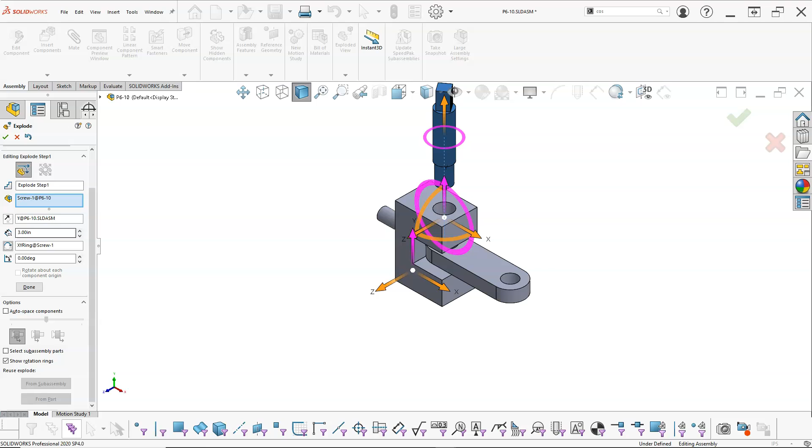Apparently my auto spacing is on. Since I'm only doing one, I'm going to turn the auto space off. And we should still be in that chain or that step, since I haven't accepted it or done it yet. So if I put in 2 inches, it's a little bit more, maybe 3 inches. Okay, that's visible. Then I can mark it as done.

And then I'm going to bring this one out in X, and auto spacing was still on. So we'll go done. And then I can bring this one out. Maybe I'll turn auto spacing off first this time. And we'll bring it out. It goes a little bit quicker.

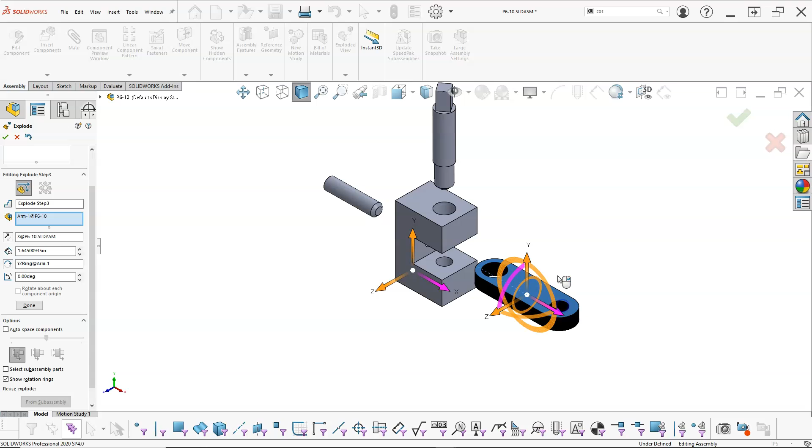Once we have the exploded view, that's going to live under the configuration tab, under its configuration, even if the only one's the default. If I double click on the explode, it's going to collapse. Double click again, it's going to explode. It's also the same as right clicking and collapse, right click and explode.

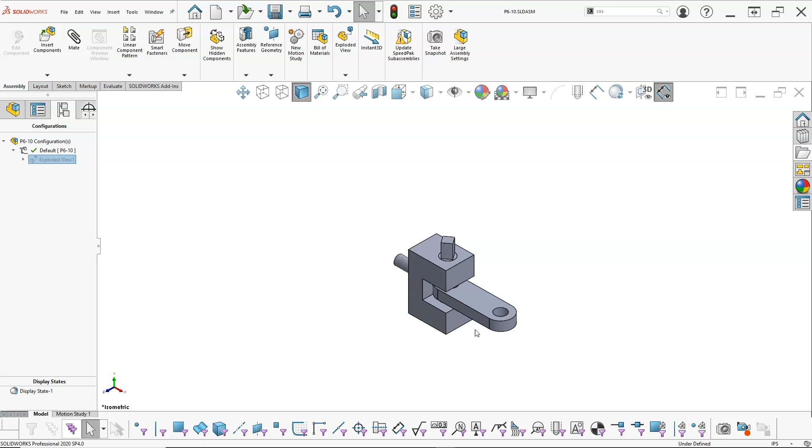So we want to save that, and no need to save this as a separate file. This is going to be visible in the drawing. We're going to go over to the drawing.

Noticed a few going up to the D and E size, and when you get that big, the text for your dimensions gets really small, 1/8 inch on a 4 foot by 6 foot piece or thereabouts. So the largest I would recommend is going to a B size. The A size is okay.

We need to look at simplifying a drawing template for this. So we'll make that a separate video here pretty quick.

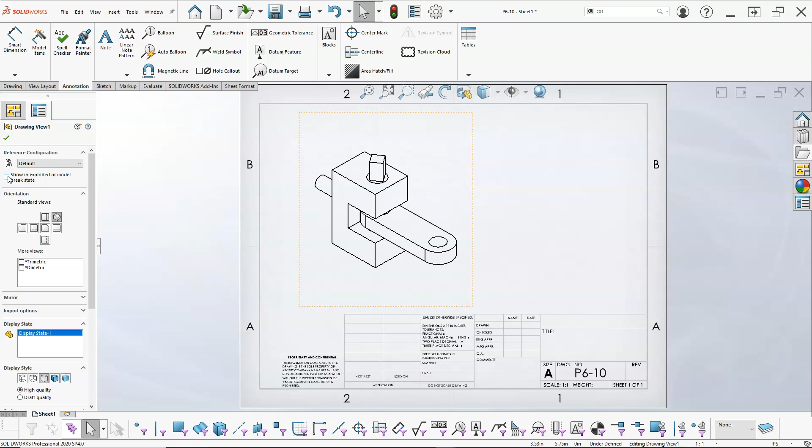So the P6-10 will come in, and came in pretty large. But when I have the exploded view, if there's no exploded view in the file, you're not going to see this checkbox. So that would be one of the indications.

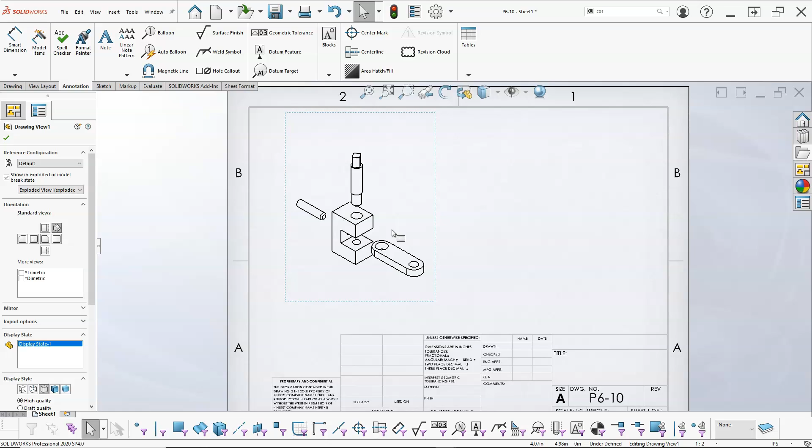And let's click, and down here at the very bottom, let's make this a half size, and that's pretty much going to be for everything on the sheet. All right, so if I wanted to stay with that, we could do the assembly. So one of the things we haven't done before is the jog lines.

So we'll look through here, view layout, annotation, sketch. Not going to be under markup and evaluate. Oh, I bet that is back under the assembly again. So if we accept the view and then come back up to the window, go into the assembly, I want to explode that out, and then back under.

Alright, so since those aren't coming up, let's go with, and that's the other jog line. So how about exploded sketch, explode sketch, and that's the toolbar, and then the exploded view. So one more, oh, there it is, exploded line sketch. So that was what I was looking for.

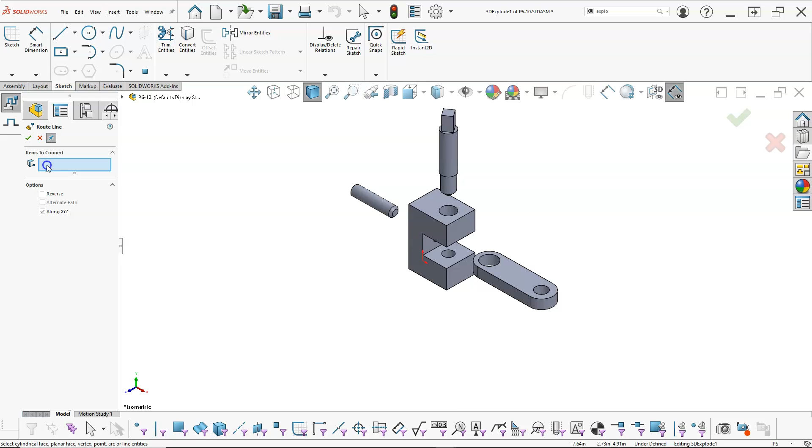We'll get that figured out. So I think I want to go to that face, and then since it's going all the way to the bottom, and I don't really want the jogs in there, so we're not going to do Along XYZ. And actually I probably just have to go back and edit that since it's in the group.

Reversing it, no, that doesn't help. And there's no alternate path available. Yeah, we'll just go ahead and keep clicking buttons until I figure out what I'm doing here. So that's not too bad, so let's go ahead and accept that one.

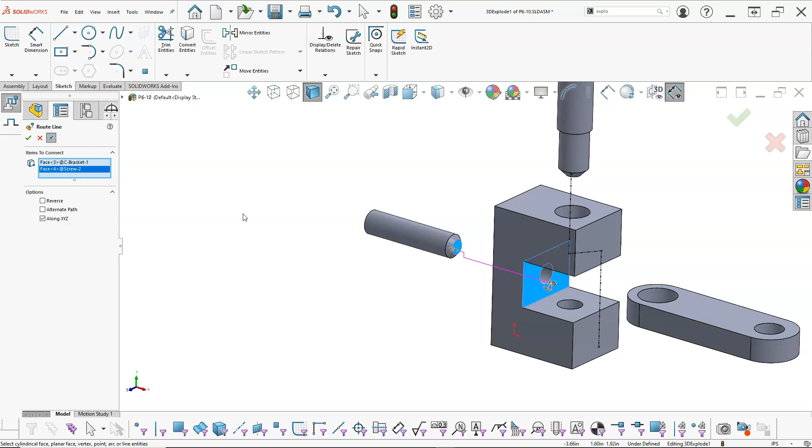And then item to connect will be from that point, shouldn't be too bad, to that face. And doesn't appear to like the point since I'm not getting any preview. So that one looks pretty good. And then this one, we might actually want the jog line, but let's go from there to there.

All right, so those aren't looking great. Let's go into the 3D Explode, and as the name implies, we are in that 3D space, so 3D is going to be our rules. So I'm just going to get rid of those.

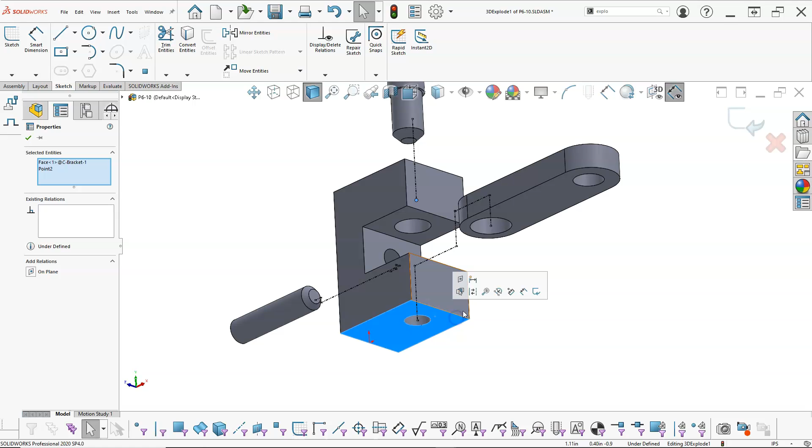If we grab the endpoint, then I can put that on plane. A little quick zoom and find that endpoint, and chances are that one's going to be on the plane. Maybe I'll try to go point to point and make those coincident. Okay, so that worked out pretty good.

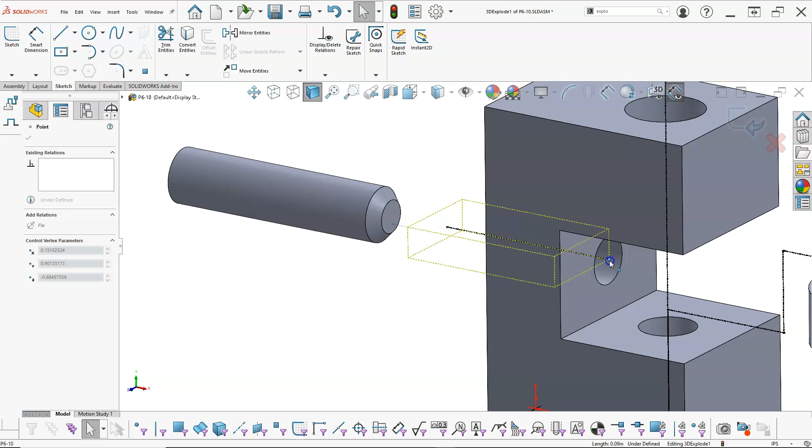Don't really want all of those. Wow, got all kinds of stuff in there on that one. So if I bring that back to the center point, it's not really letting me select. That looks okay, that looks a little better. And then maybe we'll bring that one up just a little bit.

I'm just hitting delete on the keyboard as I'm selecting those. Yeah, I don't know if it's going to let me. Nope, not going to do that. Oops, don't know that I want to pick that.

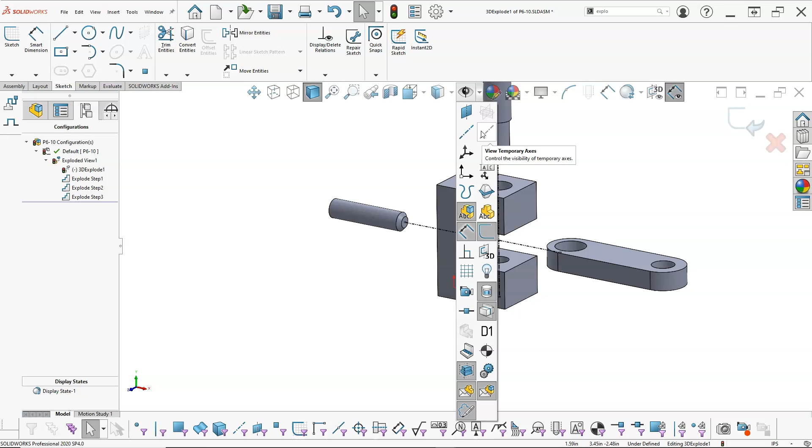So let's just turn on the temporary axes. That'll give me something a little closer to select to. Well, that's some interesting colors. And it doesn't want to go to that.

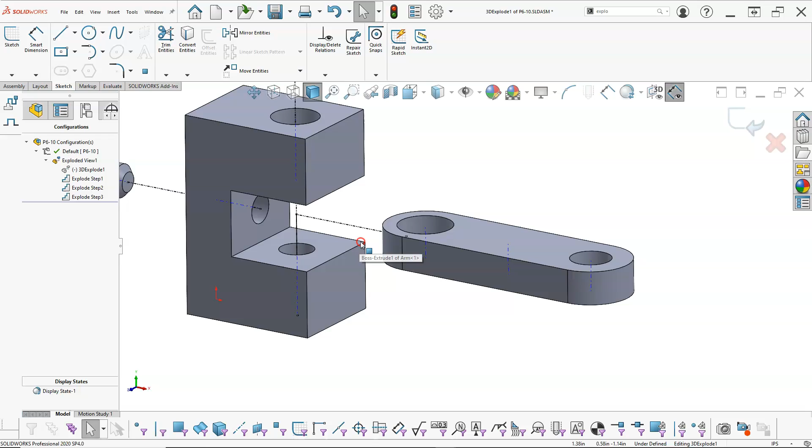Selecting and then control selecting, that will give me coincident. No, it won't, it didn't like either one of those, so maybe I'll just rotate this around and put it on the face. Oops, maybe not that one. Hit the Windows key there.

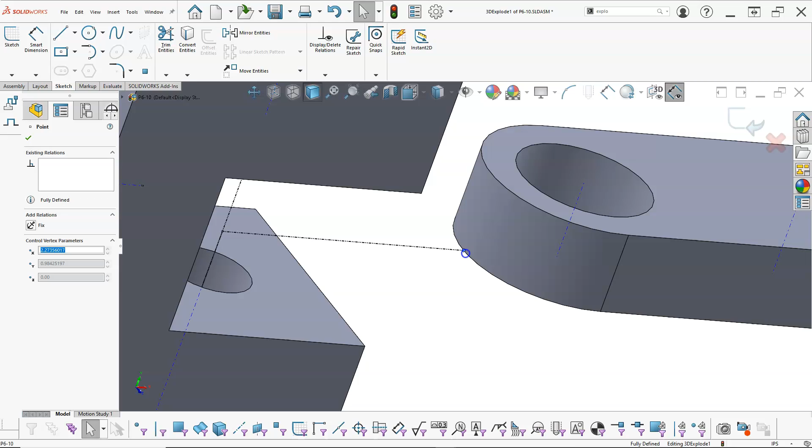There's the auto dimension that I was looking for earlier, but that's still not quite it. So let's see if we can just go to the quadrant. All right, so midpoint or quadrant, that's fine. It just gives us a quick view.

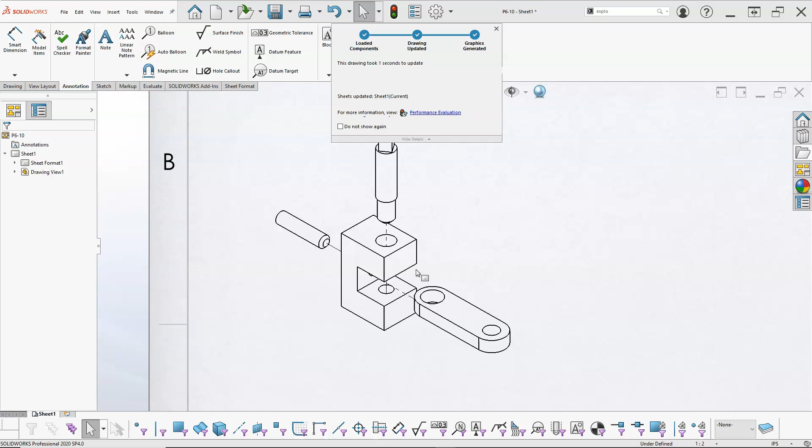So that's how we're going to get the alignment or the lines in there that show the assembly. I want to make sure to save. And then in the window, we'll go back to the drawing. Now they're going to show up. I can put those on a different layer, maybe highlight them a little bit.

All right, so let's go ahead with our bill of materials. Easiest way to get to it is the right mouse button, go into the tables, pick up our bill of materials. We're not really looking at indented, there's no sub-assembly, so top level only. Probably going to be our best bet here.

I thought I saved one. Let's see if it opens in the template. So it defaulted back to their templates, which I don't think I would have saved it there. And again, my issue with saving in the SOLIDWORKS system files is that if you're under a permission setup or anything like that, depending on the organization, you may not be able to have access to those program file locations.

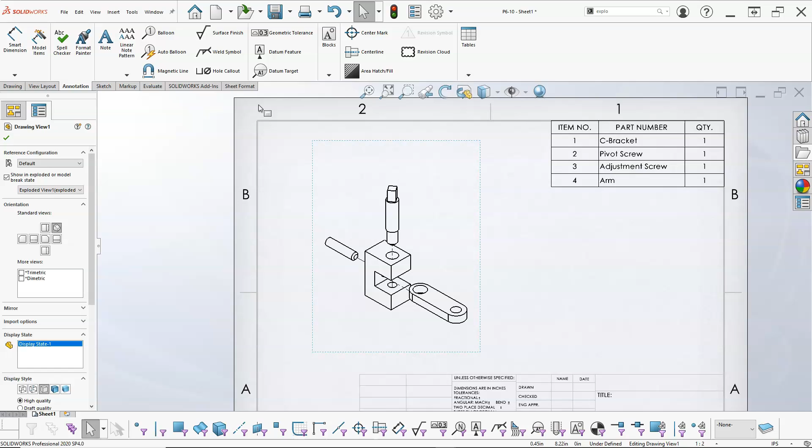And then we want some balloons, so let's go up to, and if we've been doing the auto balloon, since I clicked on balloon, let's run through that process. So picking on a face, we'll line those out.

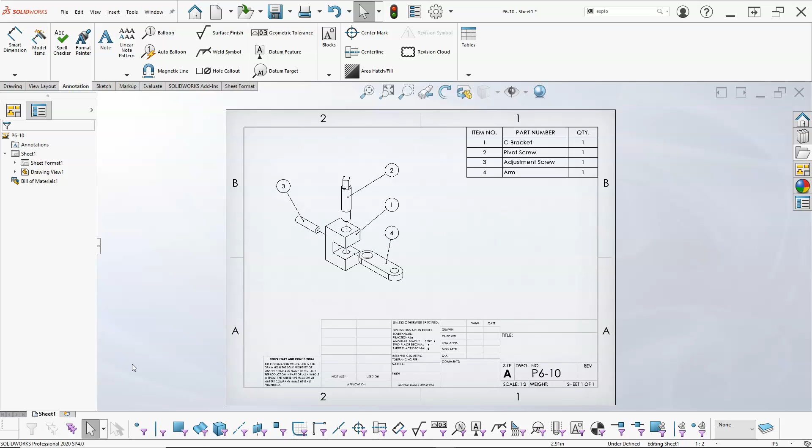Those look pretty good. All right, and again, we would maybe put those on a, go into our layers, create a layer, since it was a default template, those aren't going to really be there. So if I click on the piece, we have the format and we have none to choose from. So not too worried about that. We'll build that into a template here before too long.

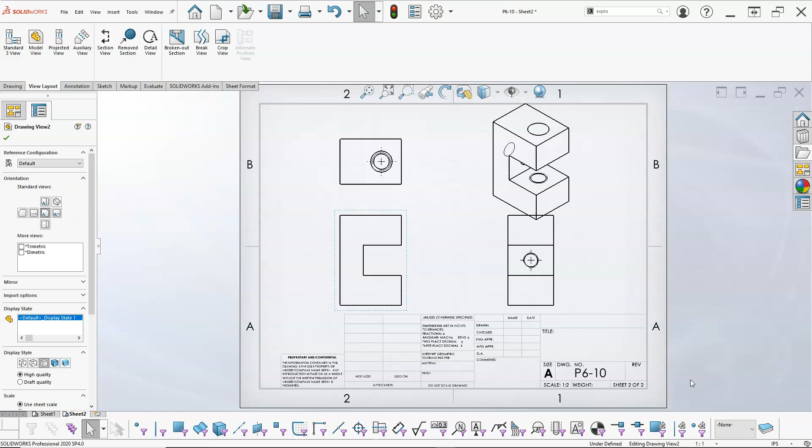Next piece, let's go with the model view. And since everything's open here, the C bracket will probably be our next. Advantage here is I can create multiple views, and they're all going to show up in the work area. And a little bit big again, so let's go to half size. That works pretty good.

And I like to go through and just set up all my drawing sheets, get everything in. Less likely that I'm going to miss something, but that doesn't mean I won't overlook one of the parts. But with 4, it's a lot easier than 10 or 12.

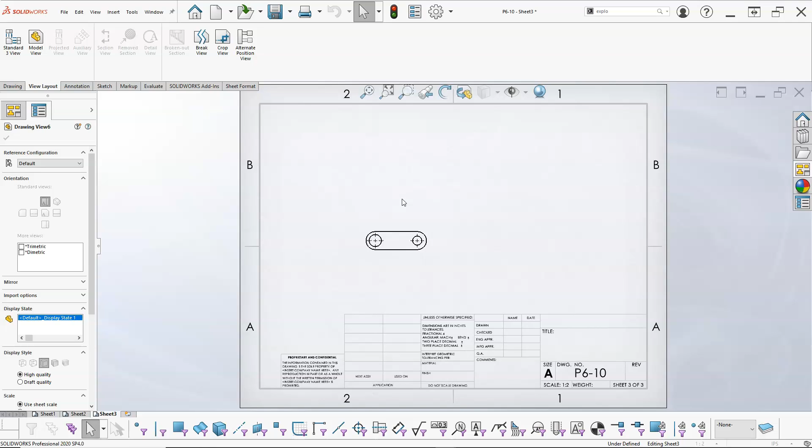So the screw with the configuration - well, let's go ahead and bring the arm in, and we'll grab the top view. I'm not sure which one, probably for space. Well, we'll go ahead and put the isometric in there. That doesn't really help me. That saves a little bit of space, so we'll go with the right side view. Nothing really on the top view that's going to add value to the drawing or to the detail.

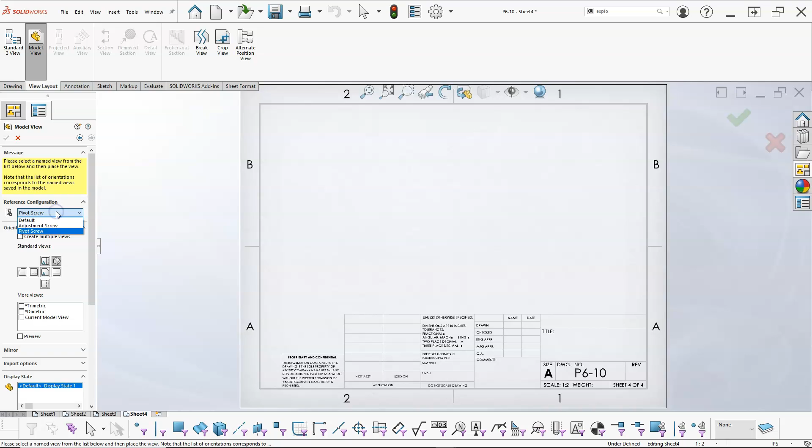All right, so we go either way for the model view. Let's do the model view first. And so when I bring in the screw and the arrow, we're going to bring in the adjustment first, and that's going to let me make the selection right there. And I can go with multiple views. We've got the isometric - I should only need the 2 views, and we'll go ahead and accept.

And then I want to make this long ways to kind of match the format of the drawing, so we'll come up to the heads up. Rotate should be available as a default. Oh, there it is - I lost the pop-up. And we'll go 90 degrees and apply.

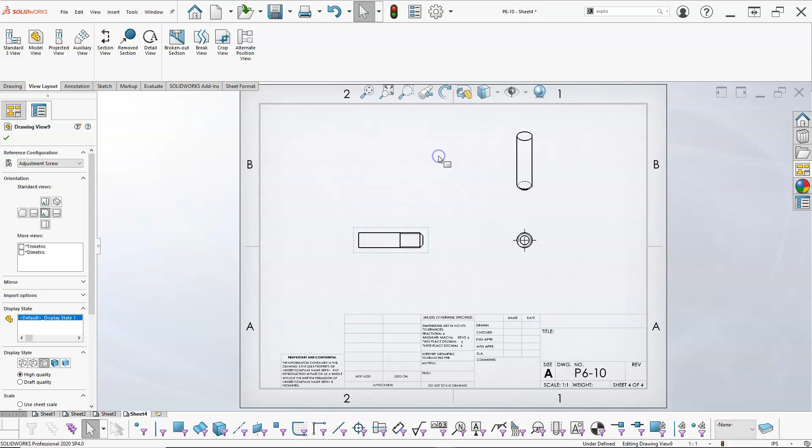And it warns me that if there's any dimensions, we wouldn't want to go through all of the dimensioning and then decide to do this. Alright, so there's our views. We could rotate that around, but not too worried - or I could just pick a new projected view if alignment.

That looks pretty good. Alright, and then if I come over to the view palette as an alternative, and we go back to pick up the screw. It's currently in auto start the projected view. I'm not seeing - well, that must be the current version of it.

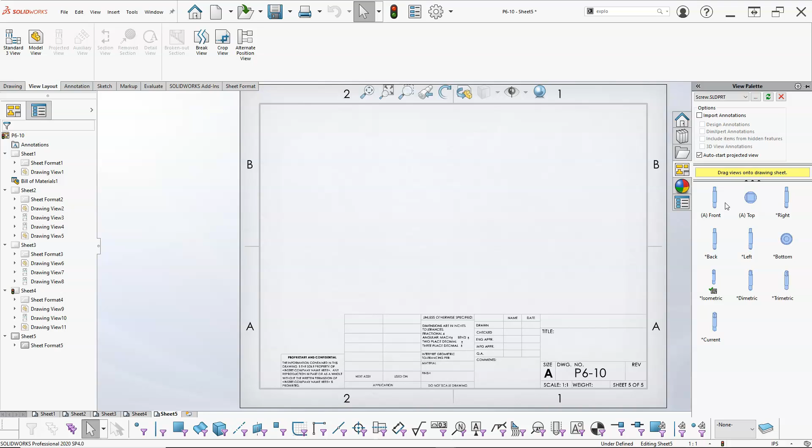Not seeing that easy as selection, but we'll go through the process. And we still have the reference configuration over here that we could pick to and bring that up if I needed to change it to the adjustment. All right, so the 1-to-1 looks okay.

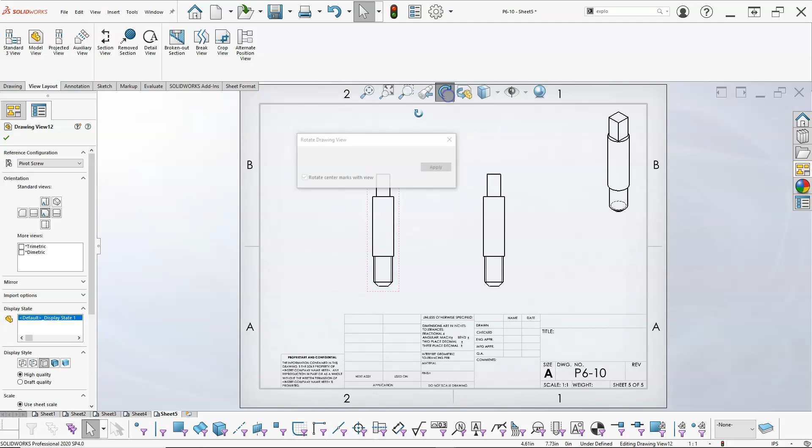I think we'll rotate that over again, make it a little easier. Not worried about the dimensions. Oh, that one actually moved with it - so it must have had that selected, or because it came in, it was linked as a parent view.

So yeah, pivot screw linked to parent, that would be our parent. So just kind of by virtue of the model view versus the view palette. Okay, so that should be our 4 parts. We're ready to make a dimensioning pass.

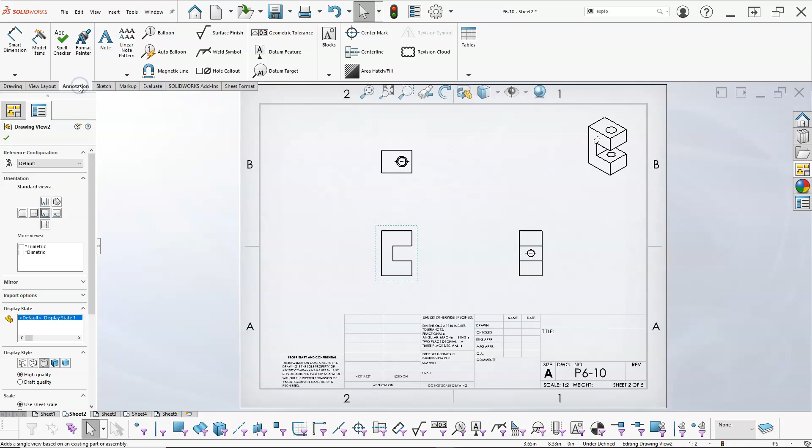And again, we design and build the parts for convenience, and we may or may not use all of those dimensions. But if I wanted to bring in, let's see if I can find it here, the annotations - I can go to model items, and we're going to bring in for the entire model. Don't want to bring everything into all views, that would make kind of a mess.

My dimensions were turned off, I believe - actually, I did not check in this one. So let's see what it does. Marked for drawing - by default, all dimensions are marked in drawing, and I haven't been seeing the purple lately, so I must not have done it for 2020.

But this is where the logic comes in: if I mark something for a drawing, it's critical, or I consider it critical, and I want it to be brought in specifically, where the rest of the dimensions may not be as appropriate to use in my drawing. So let's go ahead and see what we get.

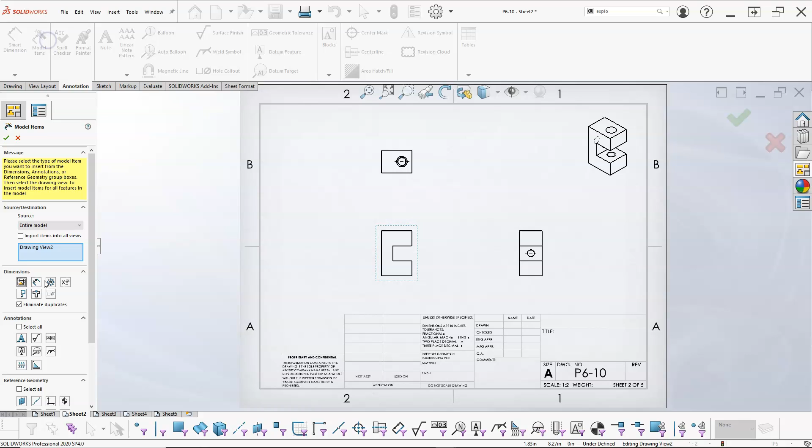No dimensions to insert, does not have. So we'll try that one more time with the not marked for drawings. So everything comes in, we're in inches. If I switch back over to millimeters, grams, and seconds, that'll update. So that brought in for the view.

All right, and so just like I dimensioned it in the sketch, this is what I'm going to get when we insert those model items and they build from the part.

So if I decided that the 20 was not such a critical dimension—really we're not too tight on the arm going in there—then as I think about my tolerances of the three, I would probably keep two, with the gap being one of them. The other 20, not so much.

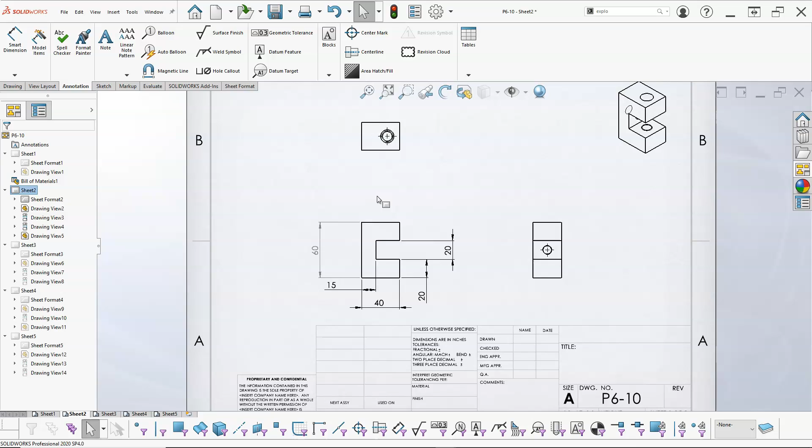So I'm going to reapply this dimension, bring it over. Notice that we have a different layer or different format, so let's see what those pull up as. So 'other,' and this one's set at none. So other than it being inserted from SolidWorks, we have the grayed out look. That would be another reason to do the layers.

All right, so the 40's there. We need a thickness, and then we'll put a dimension. So we don't need to duplicate the 40. We might even need a bottom view for this item.

And so if I bring this up, that'll be centered. The little palette that's coming in, if I click on one, see if I can get that to come back up. I don't need a duplicate 60. And if we go to the other side, that circle or half circle is just determining very quickly, instead of dragging all the way over, where it's going to be placed.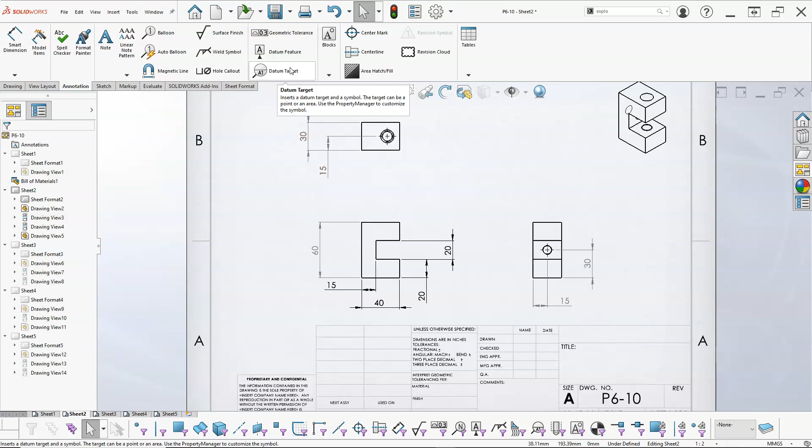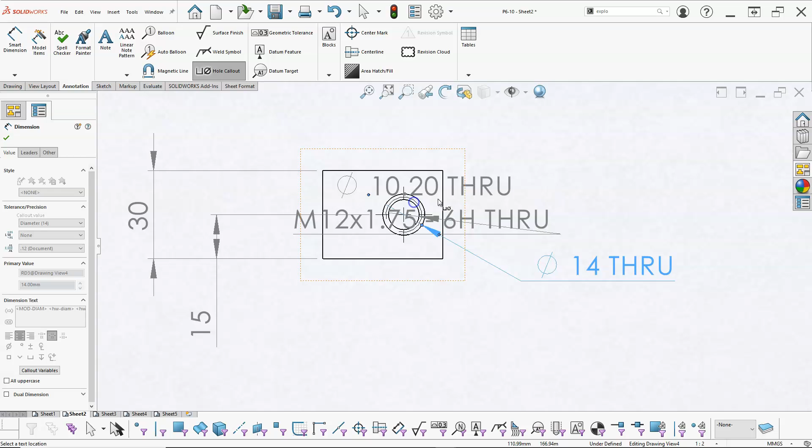And then we're going to need a hole callout. So we have the one on the far side, and this is where we want to make this as clear as possible. So we have the through hole, 14 millimeter, through basically the near side though. And then if we go to the inside, this is going to give us our tapped hole callout with the class of thread in metric, the 6H.

So this might be one of the places where I really want to include the hidden lines, just so that we have that better sense of what the construction is actually doing. The threaded simple form on this side, threaded simple form, and then the through hole on the top.

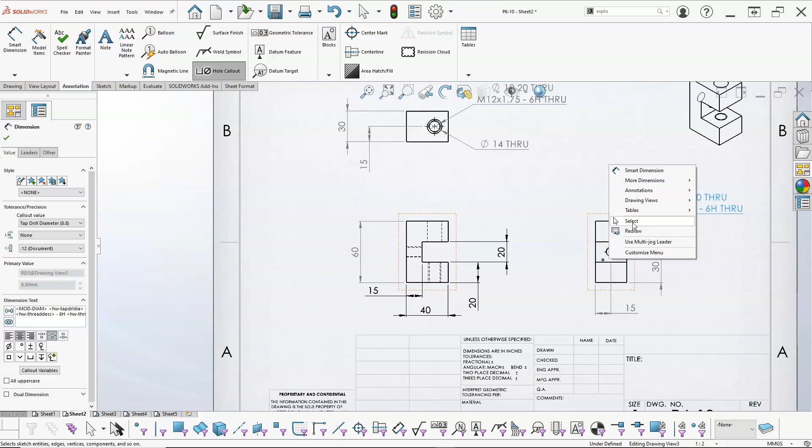All right, and then we'll go to the M12, get out of that by hitting select, and zoom to fit. So scaling, kind of separating out, making it a little more readable. We can stretch those—oh, looks pretty good. All right, so we'll run through.

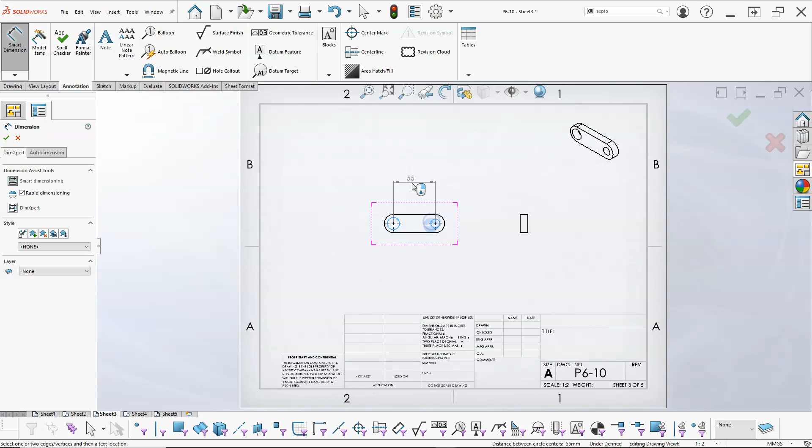Smart dimension between the two holes. For reference, I would like to have the overall—it's just going to help pick out stock and be able to grab those.

So we would come over and add the parentheses. Again, the little pop-up that comes up is also going to be able to make those adjustments. It shows up and disappears pretty quick, so I guess that would be why I don't use it as much.

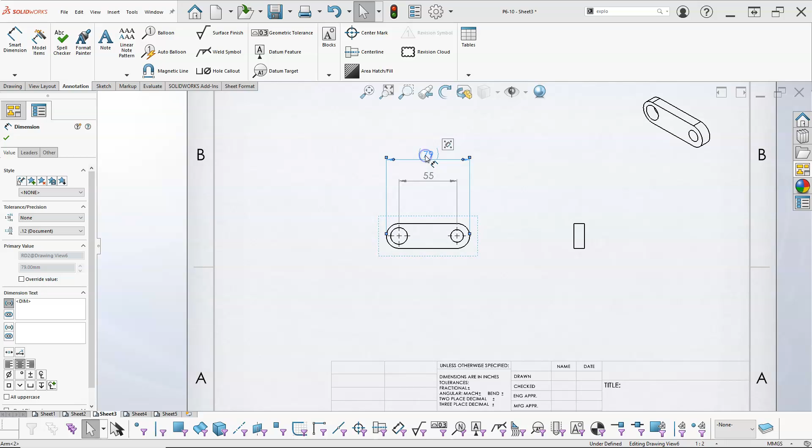And then this part is at the 1 to 2, and it could stay at the 1 to 1. I think we would be okay there. Okay, we'll adjust those back a little bit.

So we'll add our radius to the bodies. I guess we can look at the difference in the hole callouts. Since this is included in the part, it's not going to be as much.

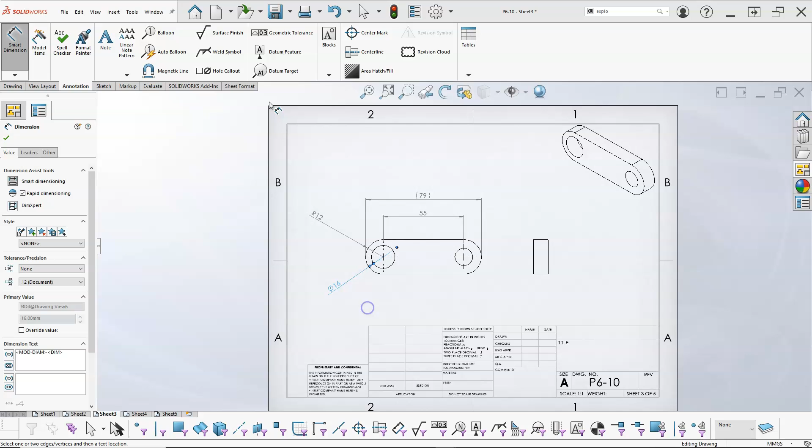We're doing a comparison—the diameter is 16. The hole callout's going to have a slightly different lead. It doesn't really matter in this case. And again, if we were going to switch over to the hole wizard for whatever reason, we would probably have to reapply these. It would lose the connection, the associativity.

Okay, apply our thickness—that's looking pretty good. So the only thing here is I'd probably just pick them to be consistent, my OCD showing. So smart dimension, pick up the same thing.

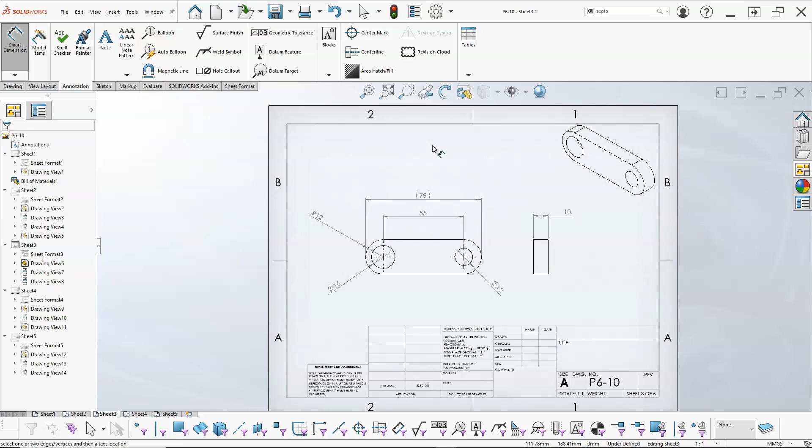And again, I'm in the ISO standard for the drawing. If you want to switch, you're going to come up to the options. I have no preference—there's some things I like about the ISO that I will stay with. So document properties, if you want to go over to ANSI, pick on ANSI.

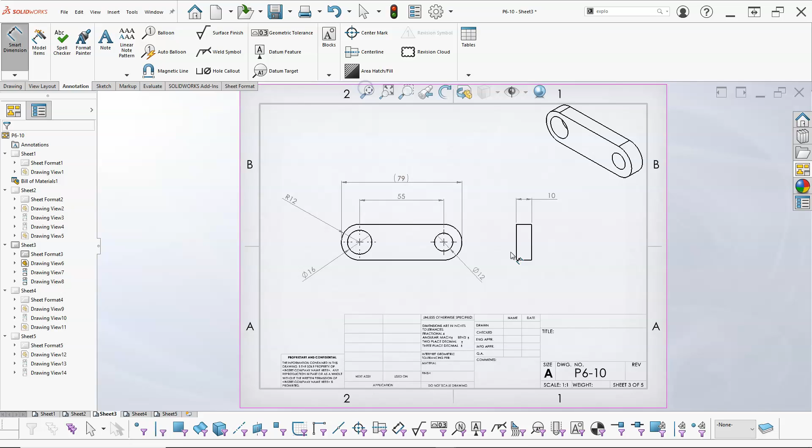And then if you made a significant number of changes or saved adjustments to the arrows or the leaders or whatever, you might want to save that modified template so that you can use it elsewhere. All right, so we pick up for the adjusting screw.

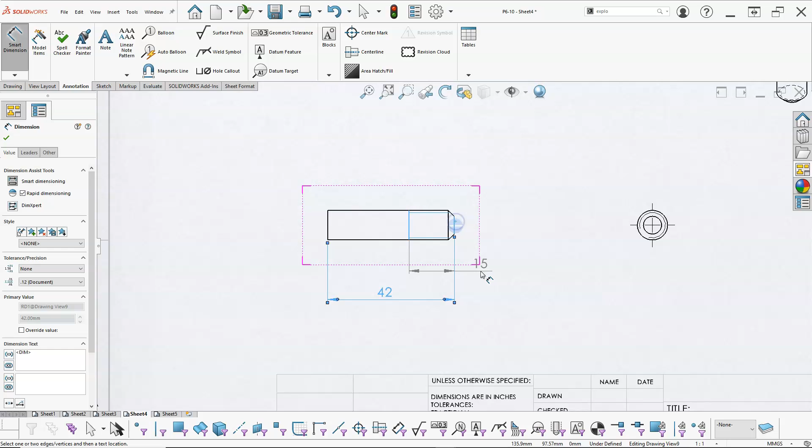And then we have the length for the simple thread form, the diameter, and then we need to find—I don't know if the hole callout will pick up.

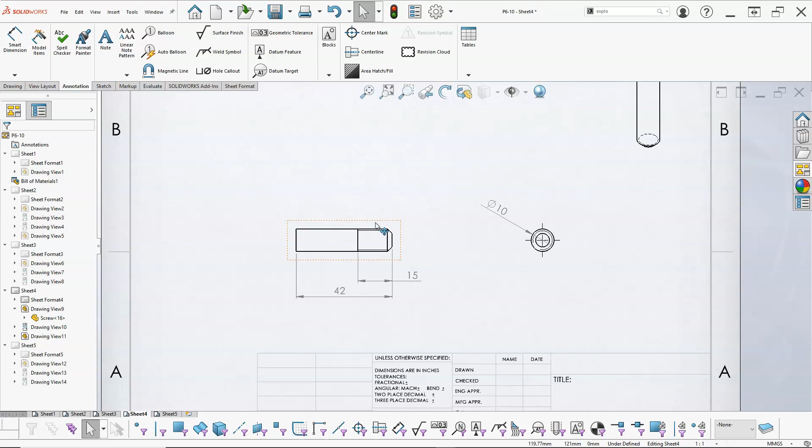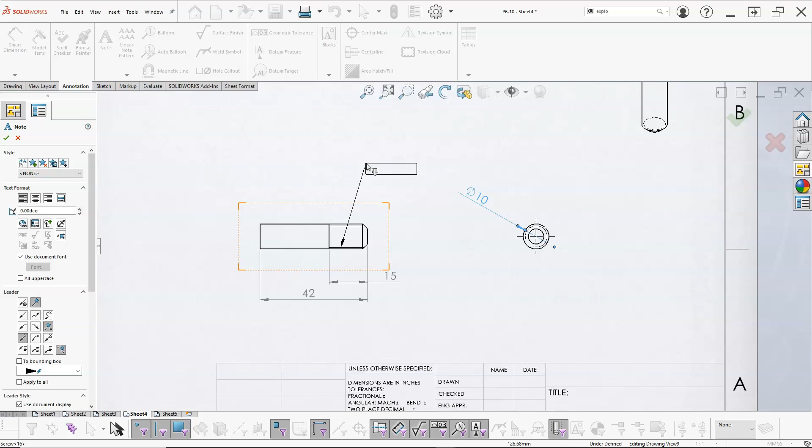It's not really grabbing that one. Sometimes they come through, but I don't remember if I told it to or not. So if we had to put an annotation there, I would probably stay with the diameter of 10 on the body. Let's just put that in as a note, and that would be something I'd want to go back and verify. Don't know why it jumped to that side, but okay. M10 by 1.25.

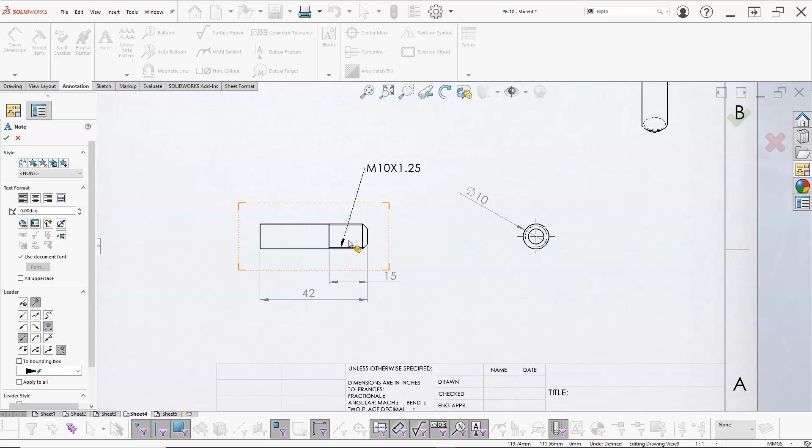And then if we put in the class of fit, the depth or anything like that, we could build that through. So that gets the note started, but I'm not happy with the callout. So you really want to be on that side.

Wow. Okay. Interesting. So this one has the note pulled up on it, but there's enough there to make the part, even if it's not maybe 100%.

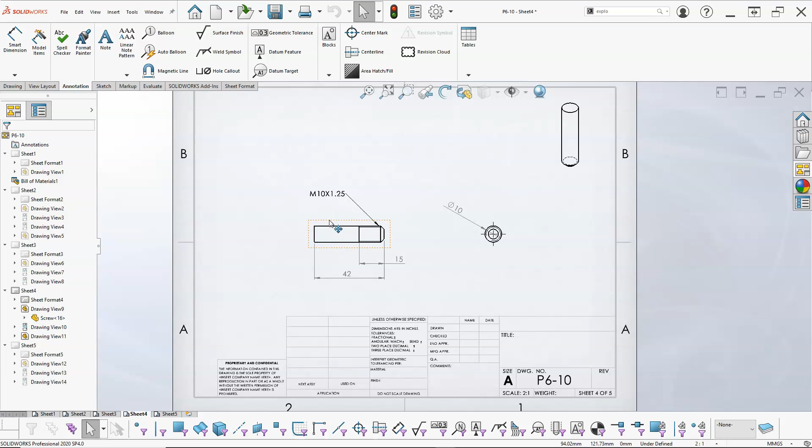If we went up to 2:1, then nothing changed. We'd want to come over and look at, it's in a custom scale. Use the sheet scale. So I don't remember if this is the one that I did the view palette or brought it in from the model view. But those are kind of the few minor things that you'll see as a difference between the two. I thought I did view palette on that one and model view on the other.

Alright, so let's see what we can do. Now this one doesn't show up with the square and it's not going to be very visible. So in looking at this and realizing what I've done, I'm going to go ahead back to the view layout and we'll set a projected view. Go ahead and bring that one out. It inserted the center marks, and again that is going to be under options.

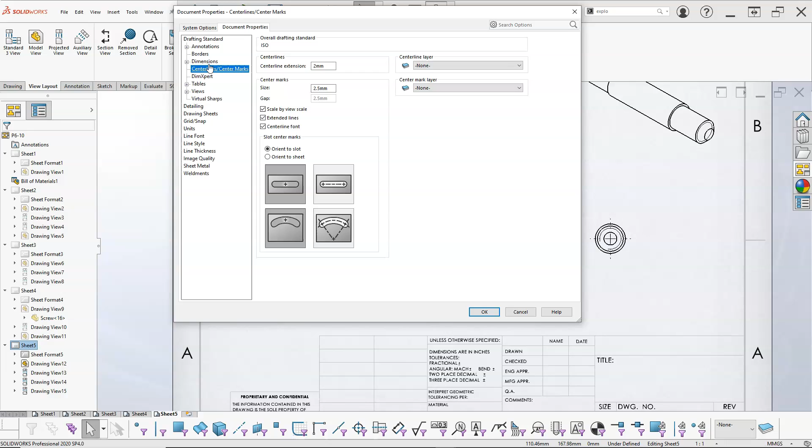and document properties. Let's see, what do we have? Center lines, and there's going to be a place where we tell it to insert those automatically, but I'm not seeing it here. Orient to the slots, orient to the sheet. There's going to be a checkbox. We'll look for that one a little later, but somewhere in that in the options we can tell it to add the center marks or not to.

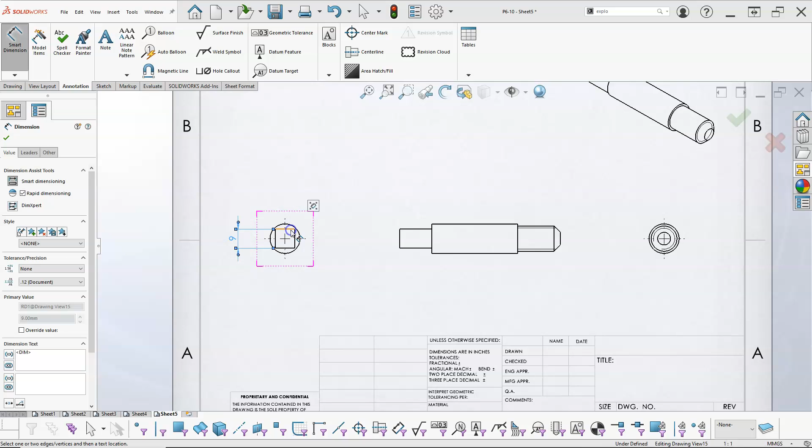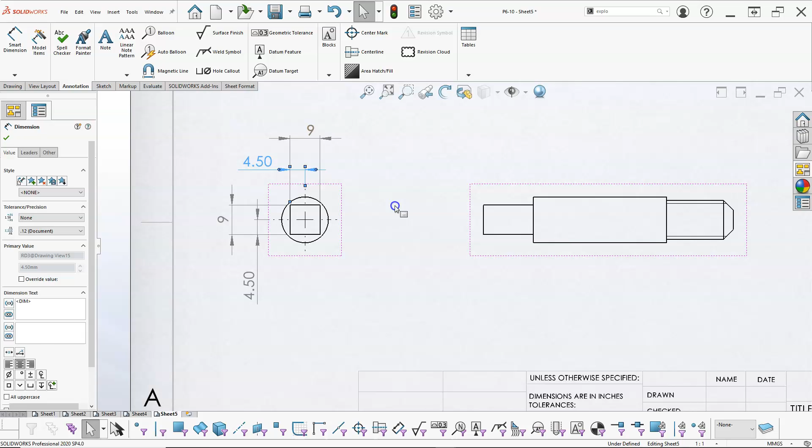Alright, so our annotation, smart dimension, and go 9 by 9. If I needed to, it comes down to how this might be set up. If we wanted to control, we really need to put the centering from the cylinder. And we'll pull those out just a little bit. Lengthwise, we'll go 15. We'll pull up an overall.

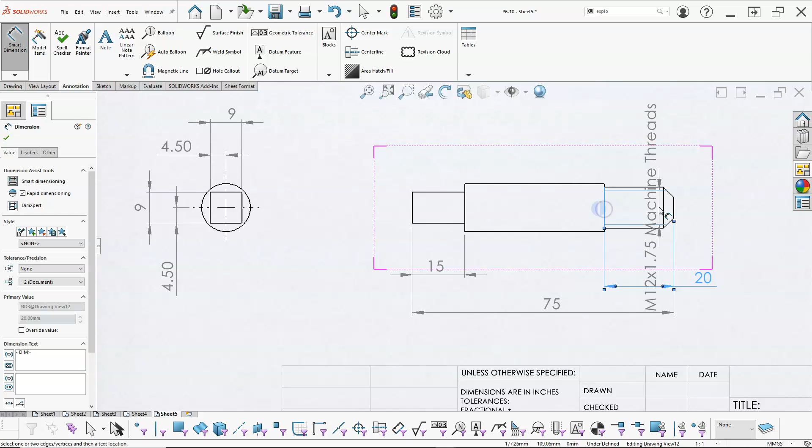Oh, that was what I forgot on the other one, which that's why this is an iterative process. And get to this one and I realized that, oh, and that popped up again. So let's see, I picked that side, and then there's an M12 by 1.75 machine threads, which okay, that's alright, but it's not really my preferred callout. Doesn't look like I'm going to get to change the leader much.

Outside, no. Smart. What I would like is that one, but it's grayed out. The directed leader is a little strange there. So again, I have to go back and see what's going on with that callout, but I'll leave that one for now. I don't think we can pick it up as a whole callout.

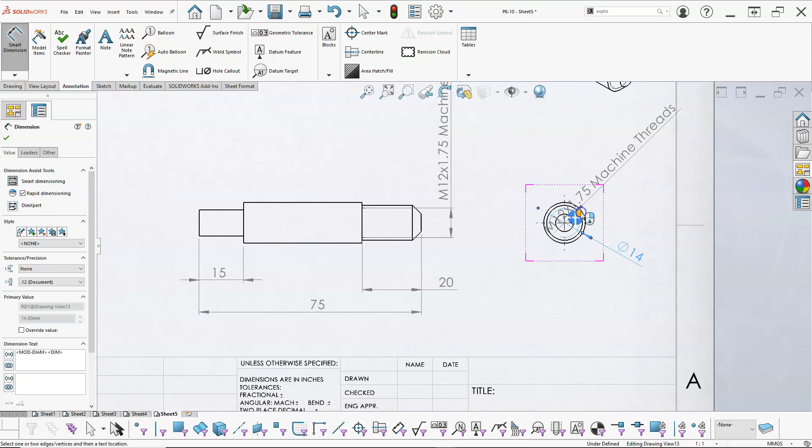So the outside, oh, this one's going to need to be a dimension anyway, so I'm going to escape, and then we'll put in, oh, that one did pick up the cosmetic thread, so I just didn't select very well on the other one. So machine threads for the callout, 20 deep, and 75 overall, 15 from either side, 14 on the diameter, and the M12 gives us the entry.

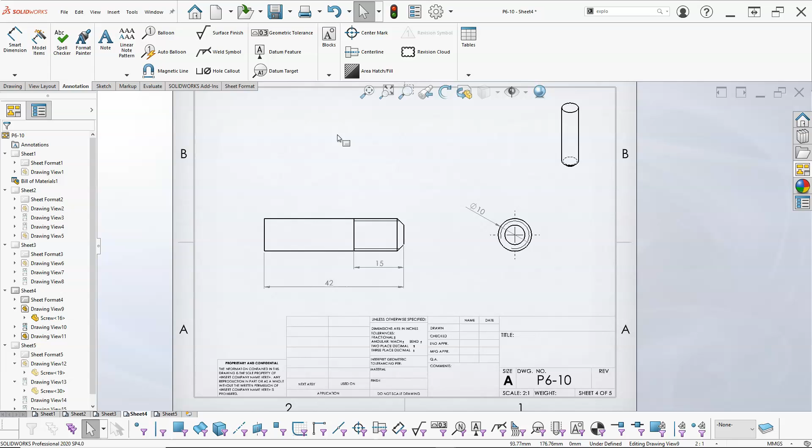So we'll pull that one out. 10 millimeters on the diameter of the part. Let's see if I can find, yep, it showed the little cosmetic thread symbol and I just missed it, so give that a little bit closer. And those are looking pretty good. So I'll go ahead and zoom to fit, make sure to save it.

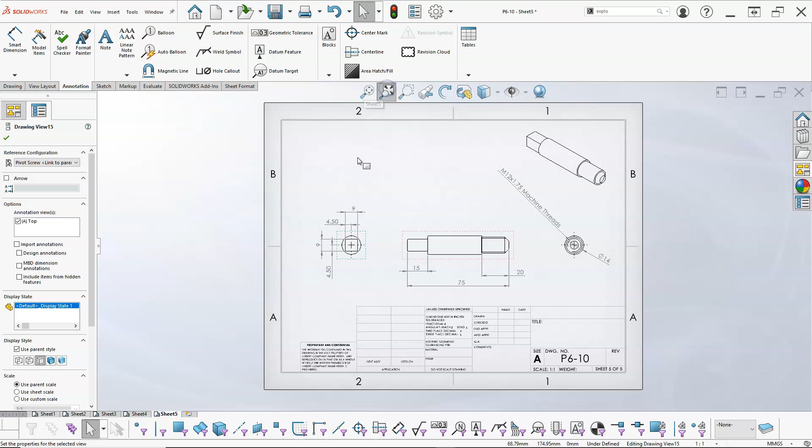And that'll need another couple passes to refine, maybe set the layers, but we should be in pretty good shape.